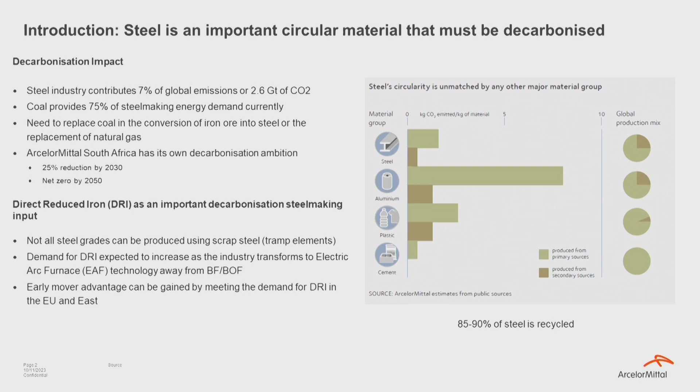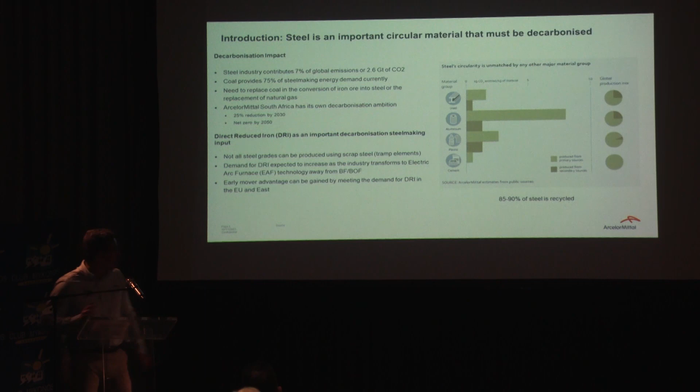So maybe a little bit of background. Steel represents 7% of global emissions, and it's an important industry to decarbonize. What I want to do is look at the various construction materials and how they compare to steel in its carbon footprint, as well as the ability to recycle those materials. It shows the flexibility of steel and the fact that steel is an important material for the next phase of production, in a decarbonized sense as well. Can we go back to the previous slide?

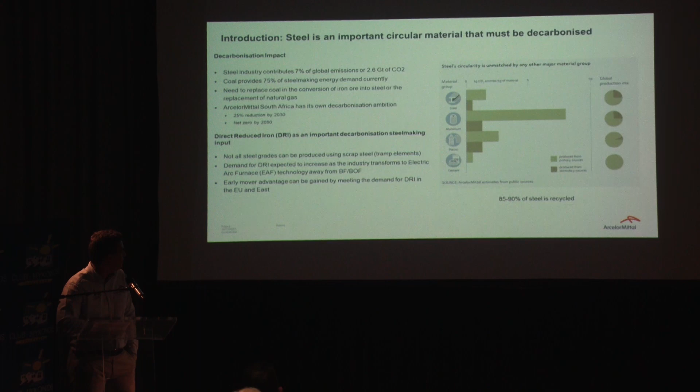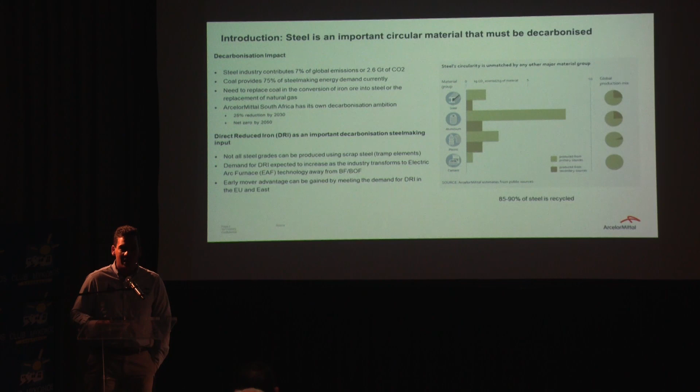So firstly, if you look at steel, its carbon footprint compares well to materials like aluminium. The green shows you the initial carbon footprint during production. For steel, it's about 2 tons of carbon dioxide per ton of steel. Aluminium, of course, is much higher. Plastics are higher as well. Cement has got a lower carbon footprint, but steel is much more recyclable. Between 85 and 90% of all steel is being recycled, and aluminium and plastic do not compare as favorably. And in producing steel from recycled resources, the carbon footprint is much lower.

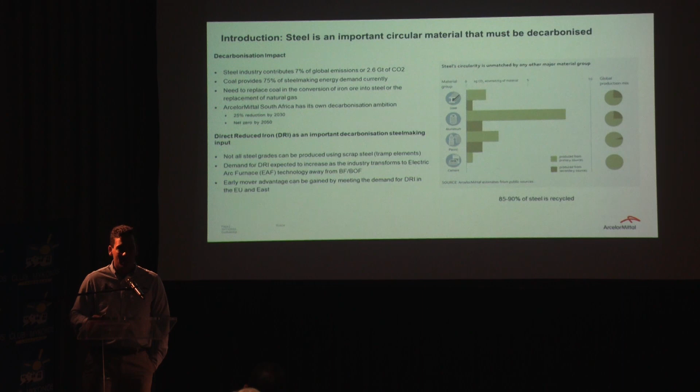So steel is very important as well in the production of the decarbonized solutions that are required. It plays a key role in wind turbines, in solar PV construction, as well as other construction materials that are very important in the decarbonization of our societies. Next slide, please.

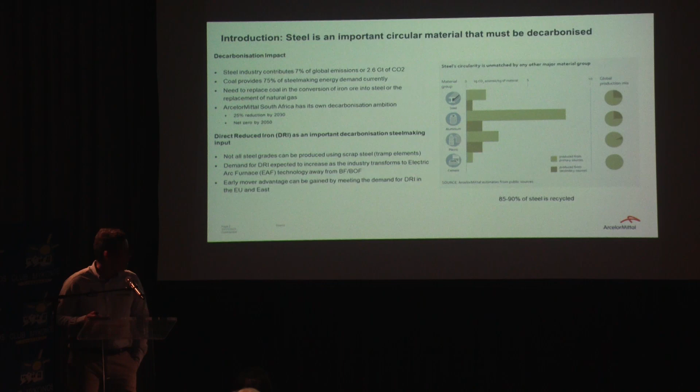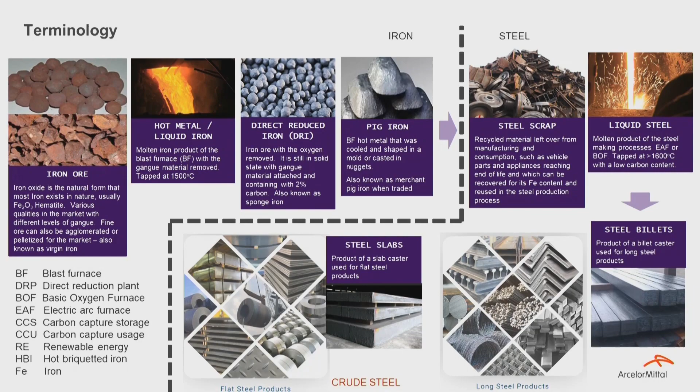I think it's very important before we continue that we look at a couple of very important terminology or definitions. The first one is that iron ore is the raw ore that we mine, and during the first step of refining, you form a material that's called either liquid iron or direct reduced iron or sponge iron. So liquid iron would be the material that's gone through its first step of refinement.

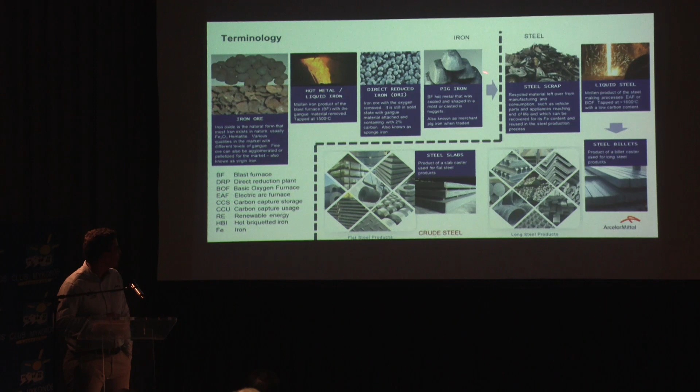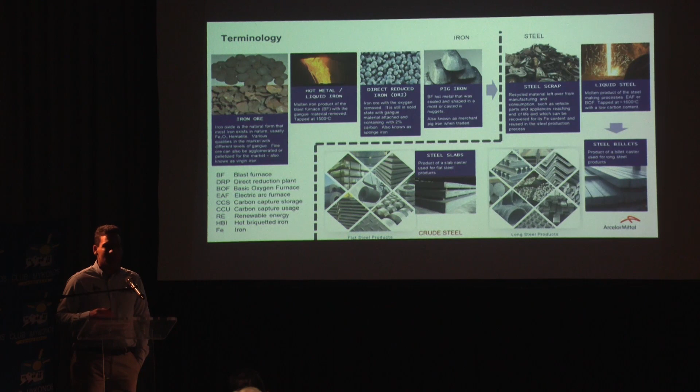Direct reduced iron, and that's a solid process. Direct reduced iron is a product where the oxygen has been stripped from the ore, and it's a very important input to electric arc furnace processes. And pig iron is also a refined iron product, although it's not steel yet. It still contains a large quantity of impurities, and also it contains a large percentage, above 2.5 to 3%, of carbon, so we still call it iron.

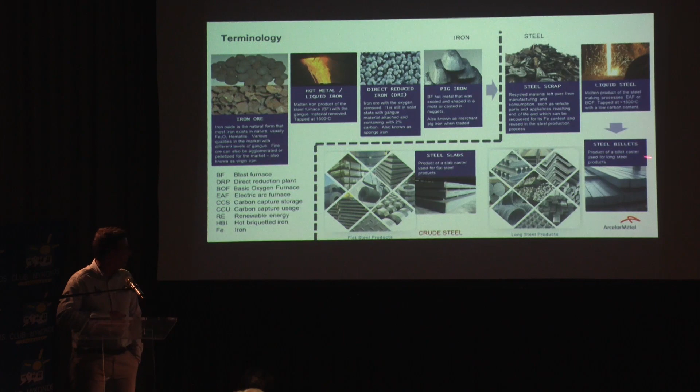Once it's gone through further refinement, we call it liquid steel, and these are the final products that we refer to as steel. And steel scrap is an important input to the production of steel as well. So in looking at it, iron ore is the virgin commodity that you require to produce high quality steels, and these are the various steps of refinement. Next slide, please.

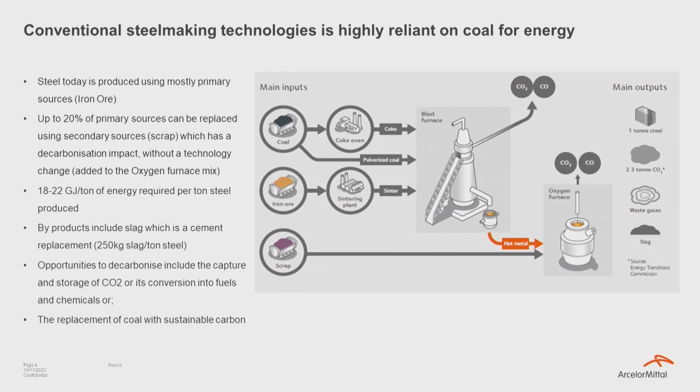So maybe to take you through the classic means of producing steel, and that's through the blast furnace process. And looking at Saldanha while it was in operation, its part of iron making was actually called the Corex process. It's the tallest when one looks at the various structures. And what you can see is that most steel today is produced from primary resources. That would be iron ore.

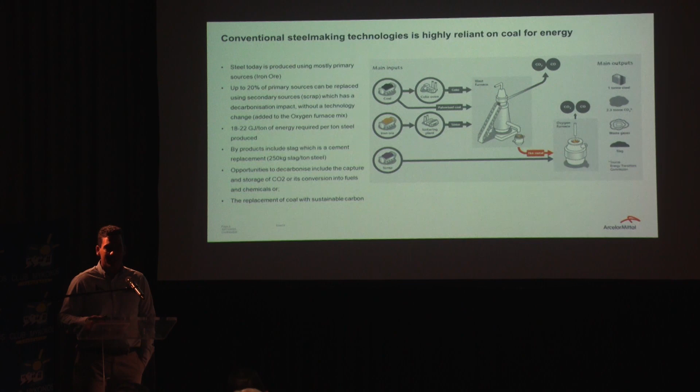And in that process, you can replace about 20% of the input with scrap, although it's very energy intensive, so you require between 18 and 22 gigajoules of energy per ton of final steel produced. And you can look at that as about 400 kilograms of natural gas, very similar to your typical gas that you use at home. So very, very energy intensive. An important byproduct from the Corex or iron making process was granulated slag, and that becomes a very important input replacement in the cement process as well.

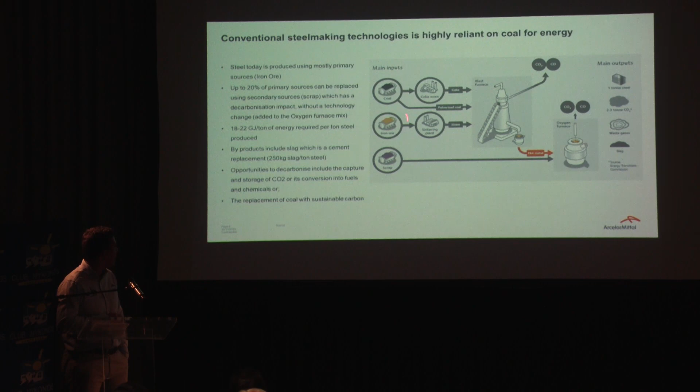Now, in looking at the process, in the very classic sense, coal and iron ore is used. You have a large amount of carbon dioxide emissions due to the fact that you're using coal. So for every ton of steel, you produce about 2.3 tons of CO2 emissions. Next slide, please.

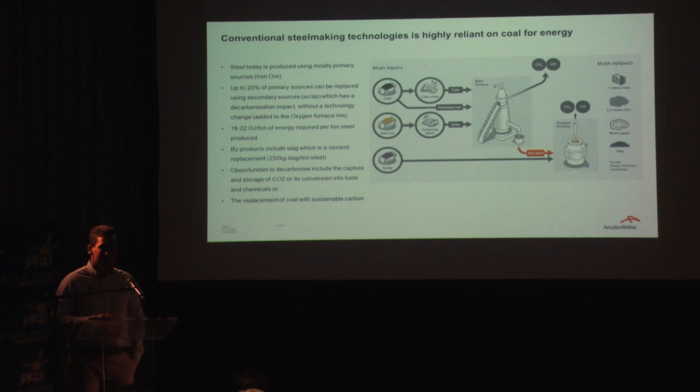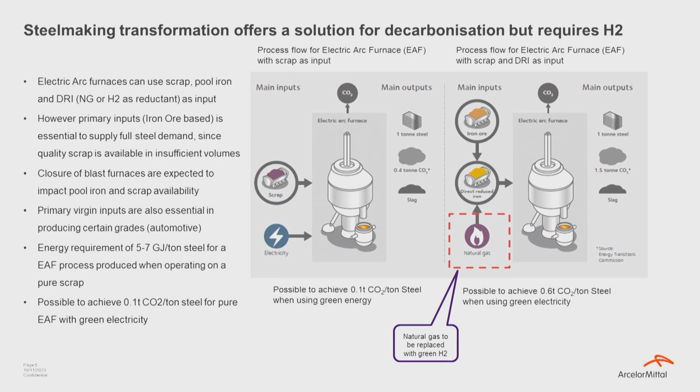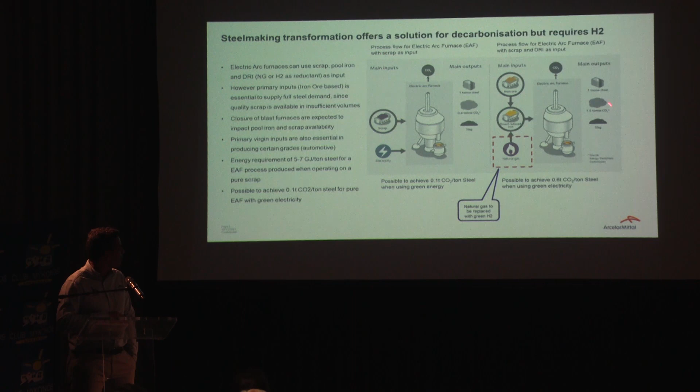There are other means of making steel, one being the production of steel from scrap. So you've got scrap, you've got an electric arc furnace, and your carbon footprint is only about 0.4 tons of CO2 per ton of steel. The second means of doing that is where you have direct reduced iron. You use natural gas in the reduction of that iron ore. And then you end up with a product using iron ore and direct reduced iron after it's been refined. And finally, you have a carbon footprint which is lower than that of the classic process, which is from iron ore and coal, but still it has a high carbon intensity. Next slide, please.

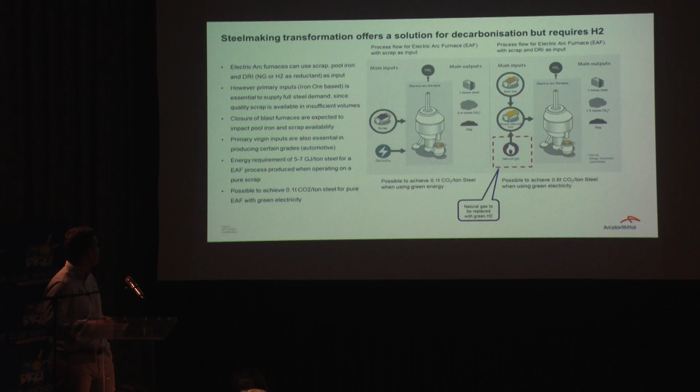So I think it's very important to look at some of the technicalities of the Midrex process, because it becomes clear as to why the Saldanha opportunity is so exciting, and that's specifically due to its installed infrastructure. Now, if one looks globally at what's happening in terms of the transformation of the steel industry to be decarbonized, it's in the construction of these direct reduction plants, and one of them is the Midrex plant. And as you would note, Saldanha Works already has a Midrex plant, so it already has the necessary infrastructure to produce a decarbonized steel.

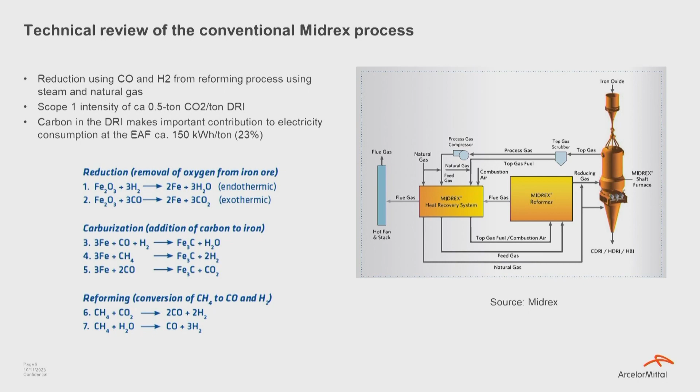This gives you an overview of the process, but essentially hydrogen and carbon monoxide in the Midrex process are already two important inputs in the reduction of this ore. And the hydrogen is formed by the splitting or reforming of natural gas. So natural gas is one carbon, four hydrogen, CH4. It's split into carbon monoxide and hydrogen, and that is used for reduction, produces a direct reduced iron, and it becomes a very important input in the electric arc furnace process.

And why this is so interesting is that the use of hydrogen for reduction is not a new process. It's only the percentage of hydrogen within the process that is being increased, and the source of the hydrogen now changes from natural gas to the direct electrolysis of water. Next slide, please.

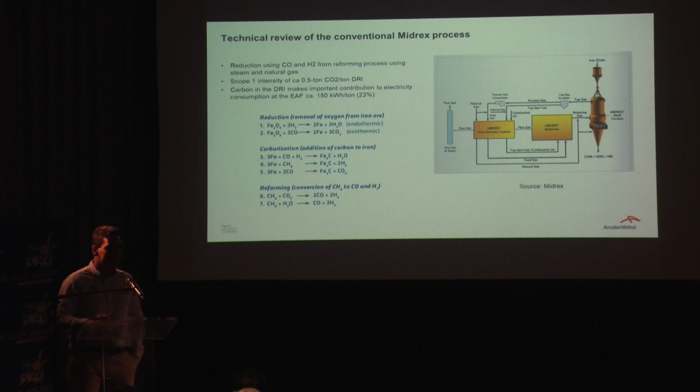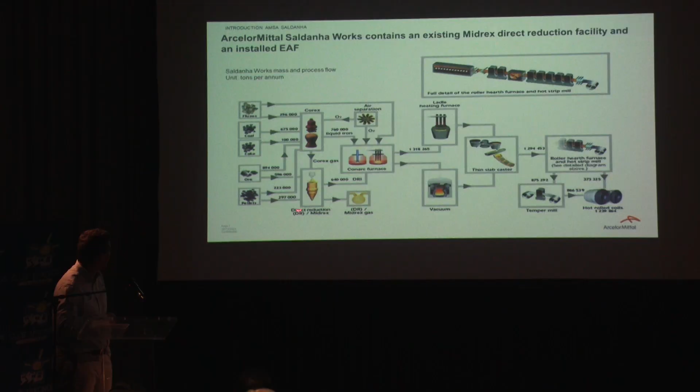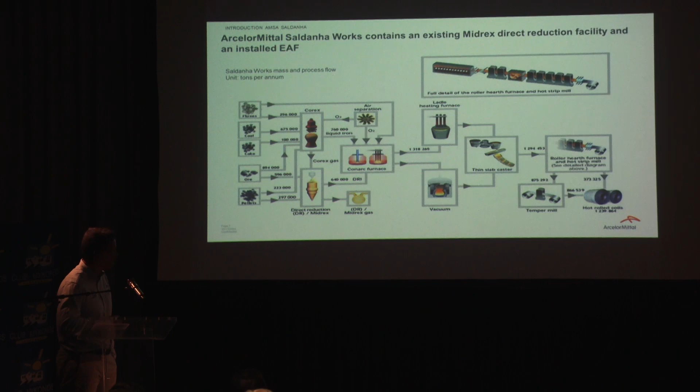And just to give you an overview of the Saldanha Works technology, it had an installed Corex, it has the Midrex. It used to use coal and coke, so the combustion of coal in the Corex process produced carbon monoxide gas and small amounts of hydrogen. This was used for the reduction in the Midrex process, so you had two products. You had a liquid iron and a direct reduced iron. And Saldanha already has electric arc furnace technology installed.

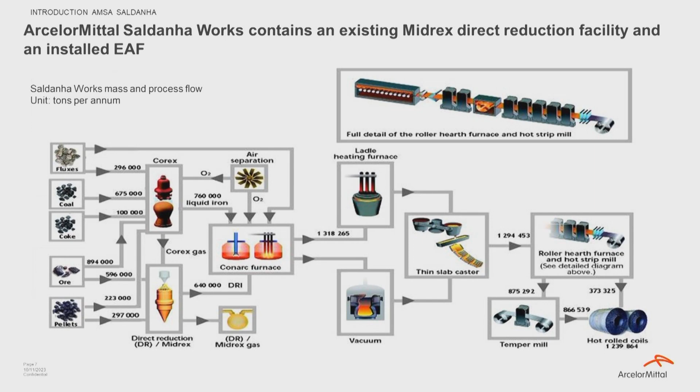And what we had noticed was that there were all of the elements of a new green production facility. The only thing that needed to change now was, instead of using the gasification from the Corex process, to look at water electrolysis in order to feed that direct reduction plant. Next slide, please.

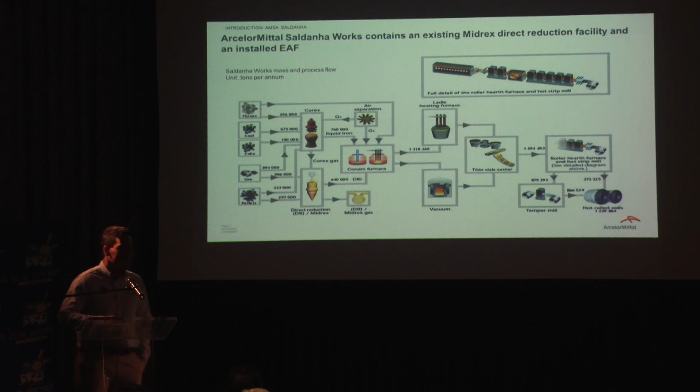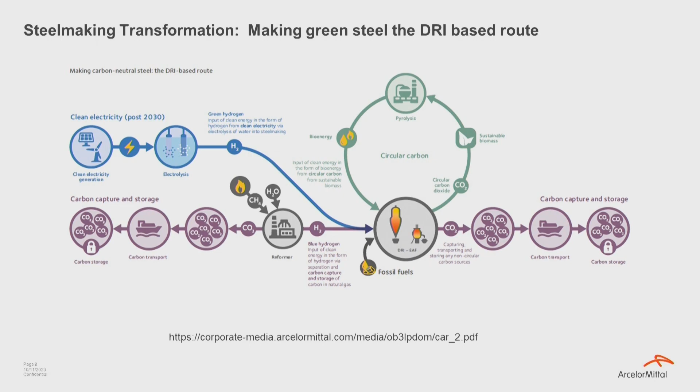The third solution is to take the carbon dioxide, to convert it either through a biochemical process or a different chemical process, and to form ethanol and other products which could be captured in the form of plastics as well. But the route that we're aiming to take is the use of hydrogen, using the Midrex plant, and producing a product which we believe demand will grow dramatically in the market as we see further and further electrification of processes. Next slide, please.

So I think we don't have to linger on the slide, but this spells out the technical solution. All of these chemical reactions are then removed. It's essentially the reaction of the iron ore with hydrogen to form elemental iron, and the byproduct then being water. And there's the ability to then recycle that water in the process as well. So the byproduct, instead of it being carbon dioxide in the past, from the Saldanha facility, it will now be a much cleaner, decarbonized emission, which is water, and a product we can recycle. Next slide, please.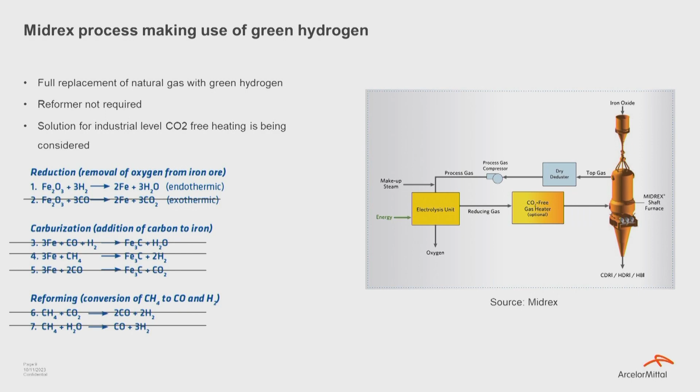Maybe while we are switching to the next slide, there we go. So I think that ends the background, and now to summarize what the project is. We are looking to produce 1.2 million tons of direct reduced iron using hydrogen. That's for local consumption or export to places like the EU or the Far East. We have partnered with other big commercial partners in order to produce the hydrogen. Sasol is one. And recently we've brought in a competent renewable energy player in the form of Mainstream Renewable Power as well.

Our ambition is very ambitious, but we're looking to start up this facility by Q4 2027, Q1 2028. And it's still highly dependent on the ability to prove that it's commercially feasible, because we're going to require a commercially sustainable business model in order to attract the necessary funding to operationalize the process.

Key findings that we've already found is that technically the plant is in good condition. It lends itself to this process, which is quite exciting for us. It does require some modification in order to accept hydrogen, but we believe it's definitely technically possible. There's quite a few strengths to the Saldanha location. It's where we sit. There's an existing deep water port versus other projects. We've already got the technology installed, which de-risks the project, and it opens up the opportunity for investment. And then finally, we've got attractive renewable energy resources in South Africa.

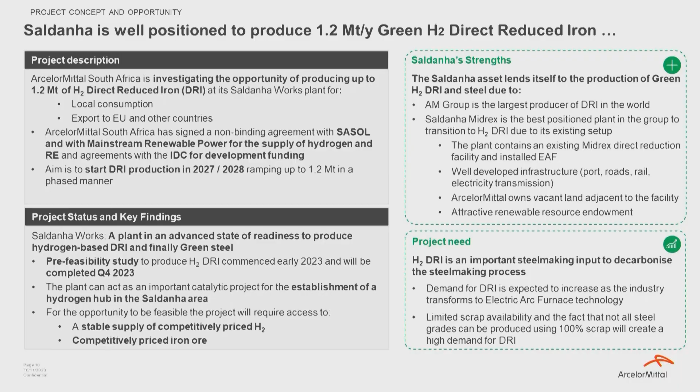The project need: we project that by 2030, the demand for DRI will be around 190 million tons. Currently, only around 60 million tons of projects have been announced. So there's definitely a growing demand, and that demand is not being satisfied by the existing projects or planned supply. Next slide, please.

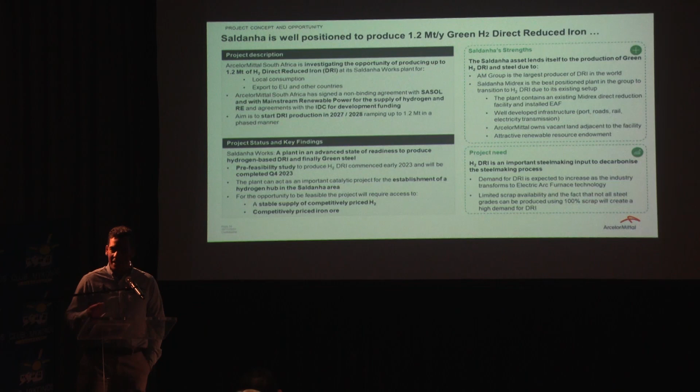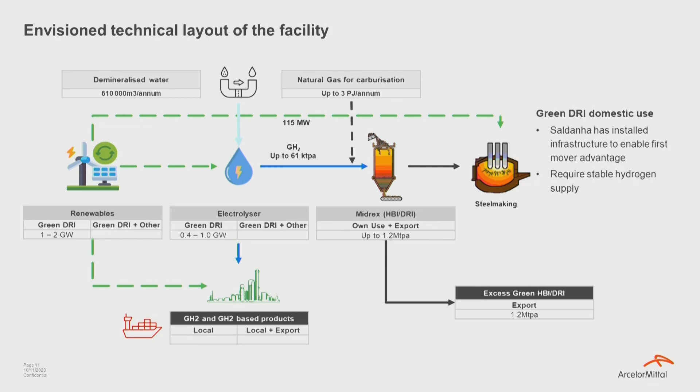So just a quick overview of the technical solution. How do you make green or hydrogen DRI? You need water, and you need about 610,000 cubes of water per annum. It's less than the water we used in the past during the operations of the site, and we'll dig into that a little bit more. So you need to desalinate water. That water gets fed into your electrolysis process. You need renewable energy. It can come from wind, solar, or other renewable resources. You split the water into hydrogen and oxygen. That oxygen can be used in the medical industry and other applications.

You've got hydrogen, and that hydrogen moves to the actual Midrex process. You need about 61,000 tons of hydrogen per annum to fully utilize the facility. That hydrogen can also be used to produce other products. And then finally, the product, which is 1.2 million tons of DRI, can then be exported or used locally in the production of green steel. And this is what we are aiming to do.

We expect that the international market for DRI will be much more willing to pay the necessary price or price premium for the product, and there will be a shortage internationally, so immediately international markets is our first aim, but there's good opportunities locally to produce green steel. Next slide, please.

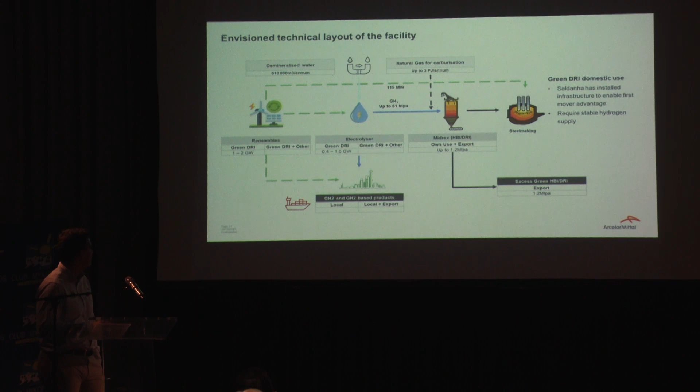So just from a ramp-up perspective, it's our ambition to start producing the first DRI Q4 2027, 2028, and then start up the facility and then gradually ramp up until we reach full production by 2035, or if possible, we could do it earlier, depending on the uptake of the market as well and the development of the market.

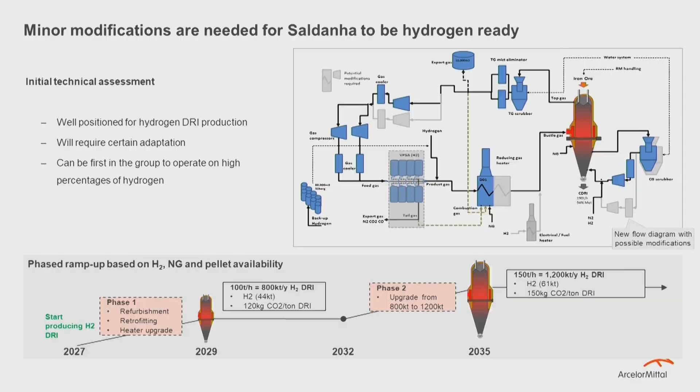As you can see, these are the modifications that are required to the plant. And in comparison, let's say the shaded sections are what's required. The blue and the red is what's already there. So as you can see, it's modifications to the plant, but most of the backbone of what is required to produce the green direct reduced iron or the sponge iron already exists. Next slide, please.

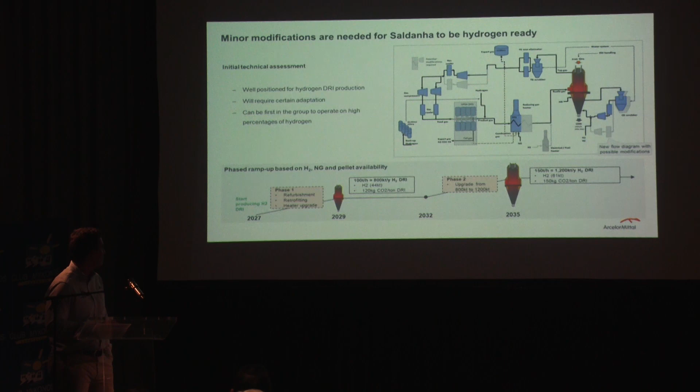I think water in the context of this session and in the context of our solution becomes very, very important. So typically in the past, in operation, Saldanha consumed around 6,000 cubes or cubic meters of water per day, up to 8,000 at certain times. And a big part of that came from potable water and treated sewage water. And as a project, we now have to look at what is the right solution for the project that would be sustainable and would ensure that our impact on the surrounding environment would be minimized.

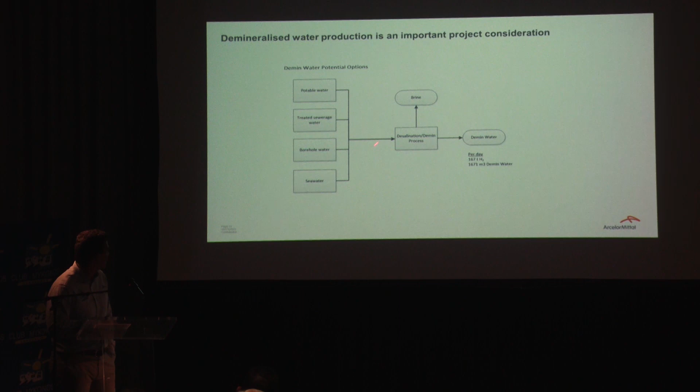So there's a couple of sources. The one would be potable water. We live in a water scarce area, so it needs to be carefully considered. Treated sewage water, we understand the impact of certain discharges into the bay. There may be a positive impact from using treated sewage water. The other one would be borehole water. Of course, it needs to be carefully considered in terms of its sustainability, if at all possible.

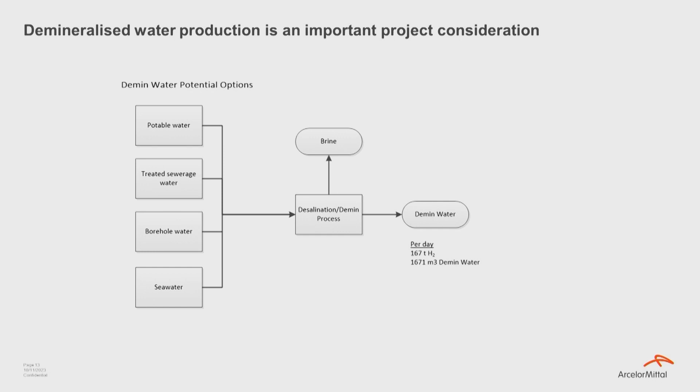And then lastly would be seawater desalination, and looking at what seawater desalination could mean for this area if there's an abundance of water available for development, for agriculture, and for other applications as well. And this gives you a sense of how much demin water we would require per day. It's close to 1,700 cubes of water per day. Next slide, please.

I think just to look at the positive aspects of what we have in the Saldanha area and what we have in the facility that already exists. I think the one is that South Africa has got considerable iron ore endowment, and we need to look at ways of beneficiating that. And the Saldanha Works project creates that opportunity.

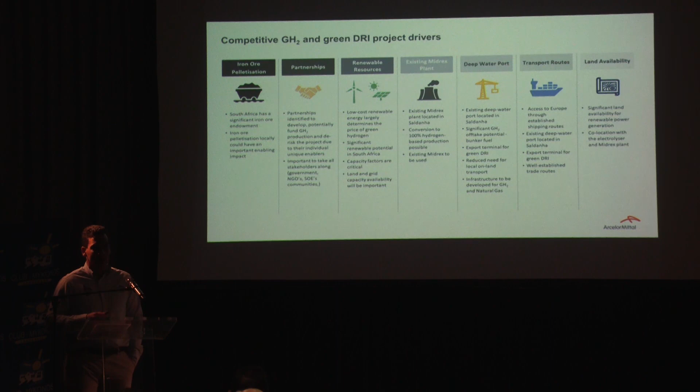The second one is then partnerships. It's partnership with other industry partners. It's partnerships with government. It's partnerships with entities like the trust as well as the community, in trying to see how we jointly work together to make the project happen. I think we can acknowledge that partnership will be key to this project actually seeing the light of day.

Renewable energy resources, I think as South Africa, we've got an amazing mix of wind and solar strength, and we need to look at how we utilize that to produce the lowest cost hydrogen. We've got the existing Midrex facility, which really adds to the feasibility of the solution. The next one is we are at a deep water port. It enables the export of the product, as well as being on existing transport routes, which reduces our logistics cost.

I think land will be key, land for the electrolyzers, and when necessary, land for renewable resources locally, if it does make sense. If it does not make sense, bringing in the renewable resources through the grid. Next slide, please.